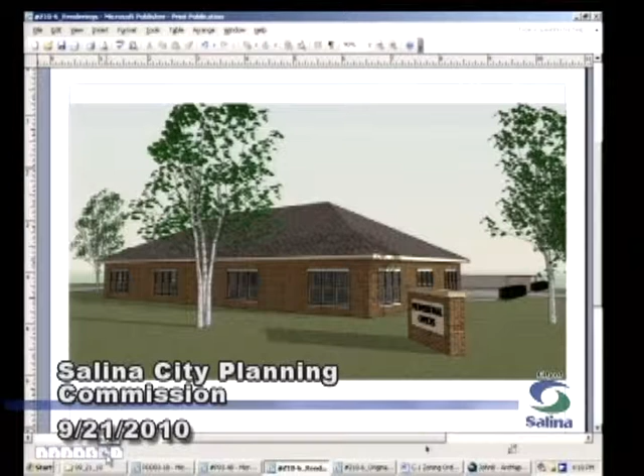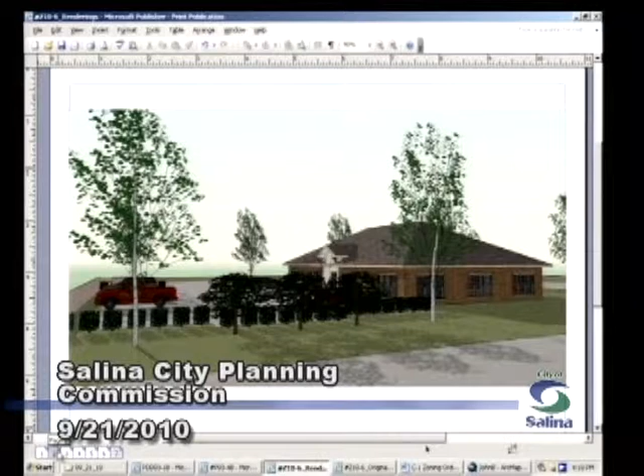This would be if you were driving or walking on Briarcliff and looking at this from the west, and looking back towards Marymount and the Marymount-Crawford intersection. So if you had a house on the west side of Briarcliff looking back, this is, as proposed, what the view would be. So I think with that, John, if you could go back to the overall site plan.

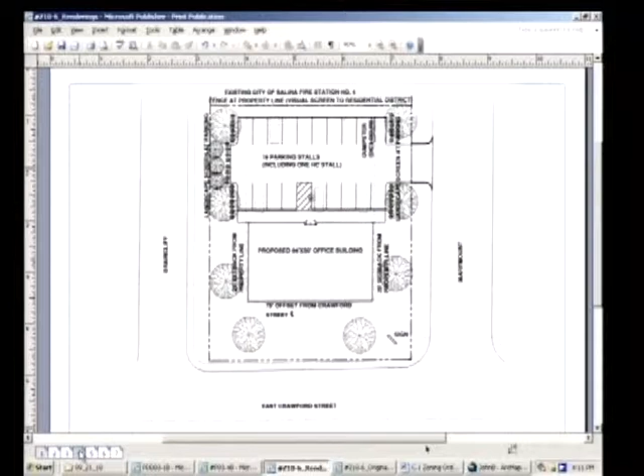Mr. Stack has not even seen this, so he can't comment to you about driveway locations or anything like that. That's why we would like an opportunity to review and write a report for you. But this does a very good job of at least giving you the concept for how everything would fit on the site. So we'd be open to any technical questions.

Bill did call me yesterday, and that's what we talked about as a good location for the driveway—far enough from the intersection as he can get and not on the residential street off of Marymount. So it looks like it's the best of what he can do there, and it looked great to us.

So we would hear any technical questions you might have, and then let the applicants present what thought went into their concept, and then, if Mr. Hutchison has any comments, he can have an opportunity for those, and then take direction from you from there.

I agree. It seems inappropriate to take any action at this stage without giving staff and the community members time to see the plan and be able to comment, and us as well. I would like to hear from the applicant and any questions that the board might have of you.

I'm Bill Shepard. I can answer any questions you have. My address is 430 Greystone.

Is the plan that this building house one office, or will there be several? There could be two. I mean, there's not a ton of room to have more than that, but I could see one or two offices in the facility, yes. Do you have anything in mind? Working on some stuff. I'm not at liberty to say at this point, so.

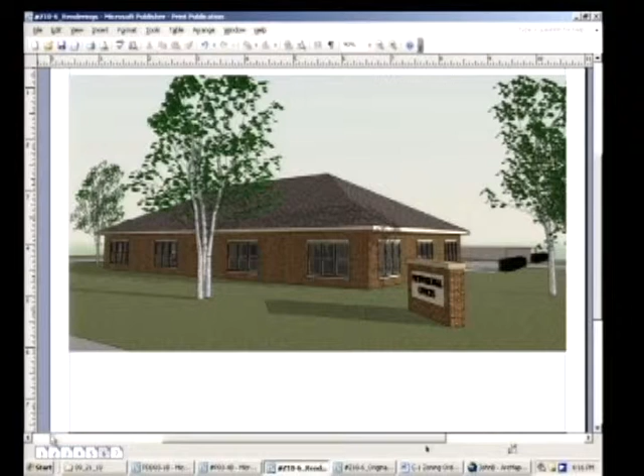I noticed on the plan you don't have any building sign, now they could have a building sign too, is that correct? That's correct. You don't have any building signs on the Crawford Street side, is that by design? That's our intention, is to not have that.

Would you be leasing the space or selling it? Both, either. I'm not sure at this point.

Was that big tree that you took out getting in the way? Yes. Yeah, 65 years old, to be exact.

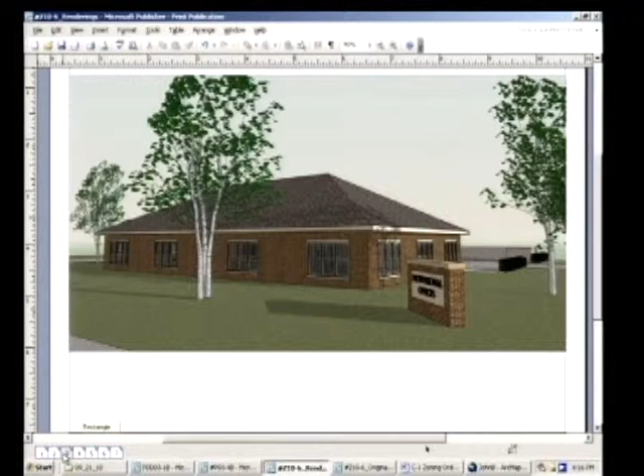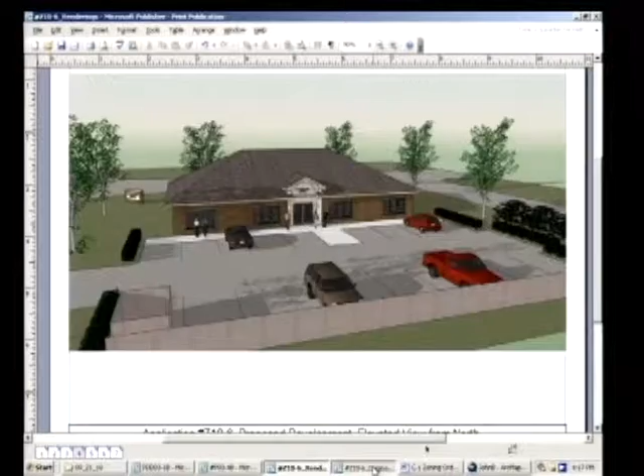John, could you go to that rendering that shows the fence on the north? And maybe you could help us a little bit, Bill. There are some trees planted along the south side of the fire station site. I think you have that in your earlier slide 2, in the original application. But how do these trees over here on the left, they don't seem to show up on those renderings. I assume they would be somewhere between the fence and the fire station building.

Our intention is to save what we can there. Those trees are actually on our property. It depends, but our intention is to leave them if we can.

But as it stands, that fence shown on the plan would be sitting on the property line, roughly. Within the property, yes. So it would be south of the property line then? That's correct, yes. And the trees would be, they're pretty much either on our property or on the property line itself.

I'd like to leave them. I think they need to be trimmed up, but I'd like to leave them. I like them, I think they add to the attractiveness of the property, and it's a natural screen. It helps people farther up Briarcliff, and that's an issue. I believe the fire department or the city's forestry department planted those trees, but they may not have done a good job of measuring.

Any further questions of the applicant? Thank you, thank you.

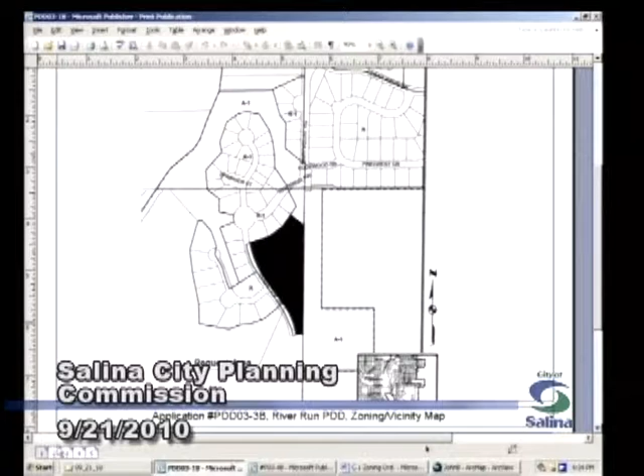We had a full 94 acres that we were dealing with. There was a condition that in the townhome area a final plan needed to come back to the Planning Commission, and that was done later in 2003. John has that plan up here on the screen.

By way of orientation, this is River Run Parkway that comes in off of Marymount. The Elks Club is over here. This is Overlook. The idea was that you would have individual driveways here, and then an internal driveway that provided access. So that was not treated as a private street per se, but as a driveway.

So we started out with one large lot, which is Lot 1, Block 5. It had 10 buildings on it, with 3 units in each building. The underlying zoning is R2 for townhomes.

There were elevation drawings submitted as part of that, showing 2-story buildings with woodlap siding and pitched roofs. The townhome units would be owned by individual buyers, and all the exterior yard areas would be common area. The lawns, yard areas, the driveways, the service drive, those would be owned and maintained by a homeowners association.

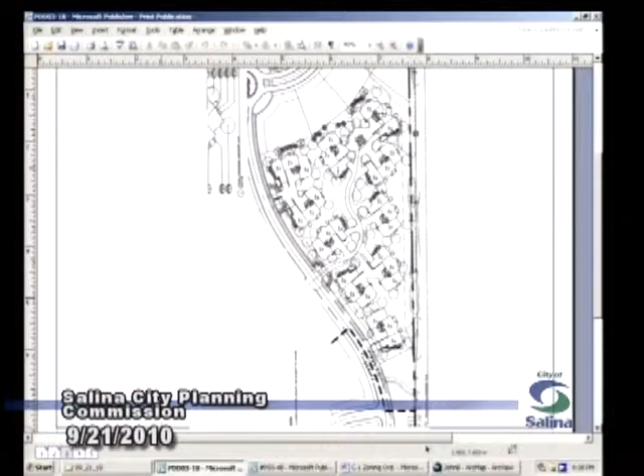John, you can go to the next one. Well, the next one after that. There may be one more after that. Okay, yeah, so basically the substitute plan is going to still have to show this townhome there and reference those units.

These are building tracks within that PDD area, and then there's some common area left in there. But the concept is that you have single family, single family, single family, single family, single family, so 8 development sites with overlook, and then these sites internal, and this would have to be a named private street.

Some of the questions we had initially were, in the remainder of the subdivision, there were 3 types of lots: villa lots, manor lots, and estate lots. Each had customized lot size and setbacks, and it wasn't clear to staff, nor could we tell owners across the street, what was proposed here in the way of those housing types.

Then it appeared to us that this was going to be a private street and try to make use of some of the existing driveway there. And it was not clear to us whether the covenants that were in place applied just to the townhome area or subdivision-wide in terms of any amendments to those.

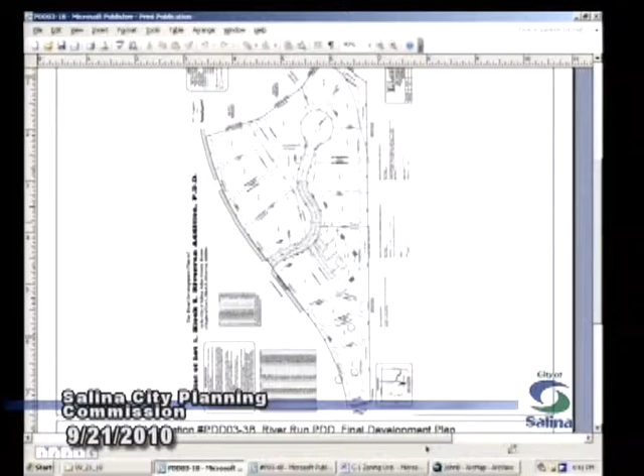So with that, this is focused on the land use, single family versus townhomes. I'd be open to any questions about that aspect. But we have an ordinance that zoned this for 10 townhomes, 3 townhomes per building, and we'd have to undo that and make this single family. And so...

We would hear from the applicant. You have some of the responses to our staff report questions attached to the report, but I think the applicant would be in the best position to state the concept for these 14 proposed lots. But before that, I'd be open to any questions you have.

Any questions, staff? Did you say the bottom three lots weren't buildable? Well, today they would not be buildable because the pavement stops here. And the utilities—John, if you could go back to that first plan.

The townhome plan, it might be two. I don't think this would have been buildable either, but basically the paving stops right here, and so does the water line. There would have to be some additional utilities extended to make those, and paving extended to make those fully buildable. Within the townhome area itself, most of the utilities are already there—it's just that they were laid out based on the townhome layout, so it has to be retrofitted to make this work. But again, I'd be open to any questions you have about the PDD concept.

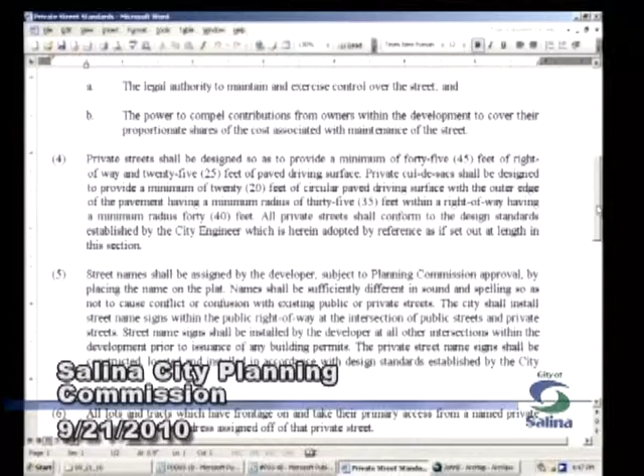Except for those things, the private streets are supposed to conform with the public street standards. They are supposed to be named. If you drive down Markley Road, you'll see at the intersection of Florida Soul Drive and Markley Road a white sign and a green sign. The green sign tells you that's a public street. The white sign tells you that's a private street.

So Florida Soul Drive is a private street. East Bank Drive off of Marymount Road is a private street. Barlow Court is a private street. All the streets in Highland Meadows Hamlets are private streets. Horizon Drive in Presbyterian Manor is a private street. And so the way those are denoted is with white street signs that denote them as private.

They are not compelled to make this a private street, but when we looked at it and we were trying to see how this could be made to fit, it comes closer to conforming with the private street standards. And so some of those have been modified, and so the requirement is that all private streets shall conform to design standards for public streets established by the city engineer.

That includes curb and gutter. So you can't build private streets without curb and gutter anymore, and the plans have to be reviewed and approved by Mr. Stack prior to construction.

You can grant variances to some of those requirements if you don't think there'll be a harm to public safety, if there are unique conditions with the property, if there are physical conditions that would make it a hardship to comply with the public street standards, and the peculiar conditions were not the result of, or were not created by, an act of the property owner.

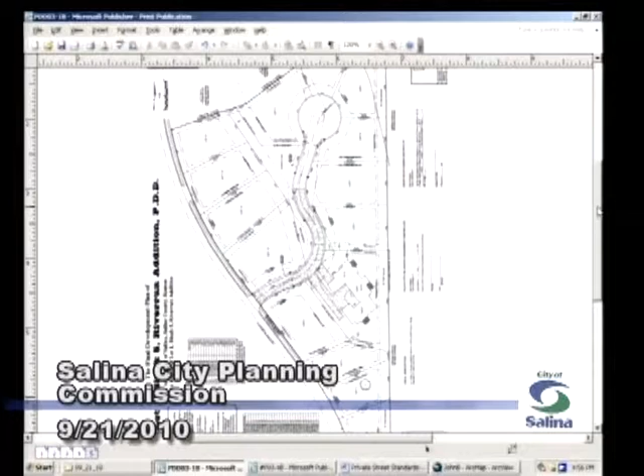So what you have is a thin corridor here, because when you build a driveway, driveways don't have right-of-way - they just have the body of the roadway. Driveways don't have to be 25 or 29 feet wide. So they were trying to take advantage of the existing roadway, and also if you start widening right-of-ways to 50 or 60 feet, you start eating into the places where you can actually build something. If you tried to retrofit this into a standard design, you'd really be eating into those lots. So their idea is to have a narrower right-of-way, but to have utility easements behind the right-of-way for the existing utilities that are there.

On lots 13, 14, 15, where do the driveways come off then? John, you may have to blow that up, I can't read the numbers. Off Overlook, okay. I couldn't tell if there were any cuts there - there's already a pre-existing curb cut on 14.

What about 15? There's nothing there, not a curb cut. But there would be, though. So these lots here would all be oriented to have access and face Overlook. This lot, this lot, this lot, this lot, this lot would be internal and have access off of that road.

Exit off of Overlook - how do you get out of Overlook on the south? Overlook is a city street. Yes, all the streets in River Run presently today are public streets.

So I'm just trying to think through - if this were a usual subdivision, what kind of street would we classify Overlook as? We considered it a local residential street. And there would be no reason not to have driveways coming off of that? No. Okay.

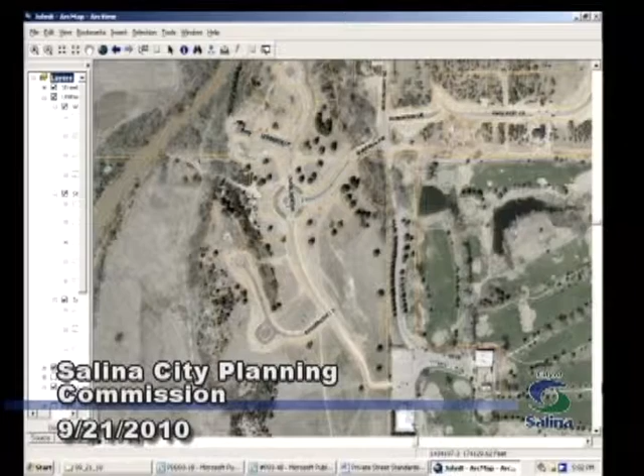I'm Sam Malinowski, Cook, Flatt & Strobel Engineers, 210 Southwind Place, Manhattan, Kansas. We've been working with Dean pretty much all summer on this. As far as all your concerns, the main reason for the right-of-way width is you've got to have utility easements in there. Being this is a retrofit where we're taking townhomes out and putting in single-family, all the utilities are in place, or we've got easements for the utilities. We're going to have some utilities off the back.

Water and sewer is all in place for everything, with the exception of lots 1 through 3, which, if we extend Overlook, then they'll take care of themselves.

Pavement width, we've actually got over half the pavement already in, and we are going to try to reuse it. It's concrete pavement, so it's beefier than plain old asphalt, and it's able to stand up. We're going to reuse all of it and just extend, basically put the cul-de-sac right where it was going to be before, and just make it single family.

Other than that, it's one of those deals where we're just trying to take advantage of the change in the economy, and like Dean said, the townhomes weren't selling. We're going to try to see if we can make single family work in there. I've got Rex Veneers here too, and he can comment on the homeowner association and the existing townhomes and all that.

But do you have an opinion on how that existing concrete paving compares to what a city concrete specification is for a street? I think it's heavy duty. I'd have to go back and look at what it actually was, but I think it's probably 8-inch concrete pavement.

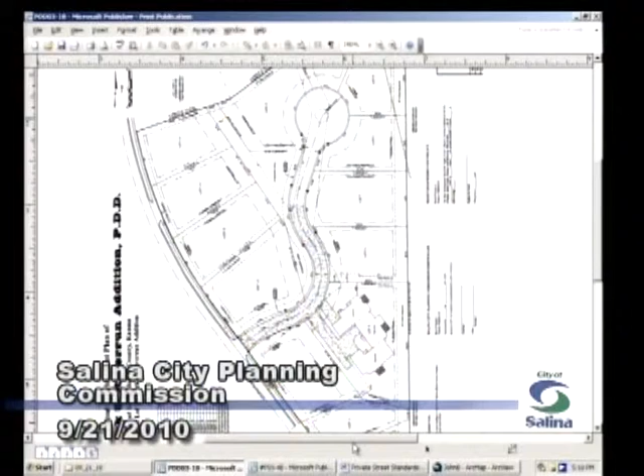I looked at, out in front of the Dillon's Superstore, Planet Avenue makes a fairly tight curve going back to the west. That is not a 150-foot radius—that curve is tighter than that, and the Planning Commission granted a waiver to that. But the 150-foot rule is just a general rule that on a through residential street, you don't want an abrupt curve that might catch people off guard.

You'll be able to make the curve, no problem—you just have to drive pretty slow. Okay, thanks. Have to do it slow.

What's the plan with Overlook as far as going on south? Now it appears to be a dead end. Yes, and dead ends are not really attractive in a city. So what's the future plan, John, for that?

If you go to slide 3 in not this application, but the next application—this is the plan that the Planning Commission saw for the whole thing, and we're talking about a street. The reason there's no cul-de-sac at the end of Overlook Drive is that this line marks phase 1. So what happened was the Planning Commission saw the master plan for the whole development, and this line right here is the phase 1, phase 2 boundary.

Phase 1 ends right here, and long term, Overlook Drive would continue down to this lower area and have a turnaround. But long term, it would terminate down there. So the reason Overlook Drive just abruptly ends is because it's not intended to be permanent. There's also an emergency access roadway that comes from the Elks parking lot over to here, for fire apparatus or other emergency vehicles, so if there was a blockage, they'd have the alternative of entering there.

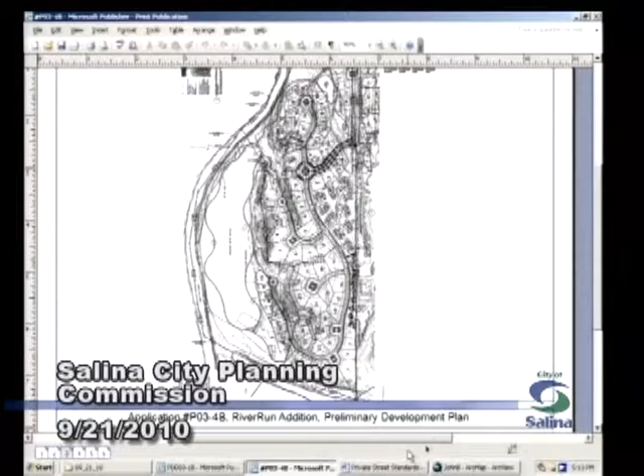Absolutely. Will you say the word chicane in it? Gotta go look that up. Yeah.

If we're looking at rezoning this for purposes of the development you're looking at, are the owners of the current unit that's there a factor in this? Should they be heard as far as this is concerned?

Rex Veneer, 6 Villa Road in South Hamilton, Massachusetts. I've talked to the Martins, and nobody's here, so that's a good thing. But I've talked to them, and they're on board with what we're doing here. In this area, on the interior part, we went from 18 units down to 9 units, so they look at that as a positive.

Thank you. I've talked to some other residents in that area, and they said it's an improvement. Everybody seems to be on board with this, but I want to make sure.

As far as the homeowner association mentioned earlier, essentially on lots 6 through 11 we'll give them their own designation, because they'll have to take ultimate responsibility if it does end up being a private road, maintaining that. They'll have another classification. Right now we have manor or estate lots A and B, villa lots, and carriage home lots. The carriage home stays as is, but now it's just 3 units, and we'll add another classification, cottage house or something along those lines, to differentiate lots 6 through 11 as also being responsible for monthly dues, really just snow removal and maintenance of the drive.

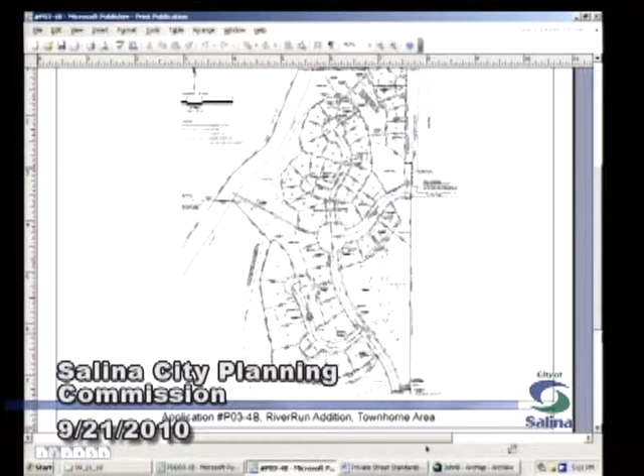Maybe that's slide 6, John. You're going to probably have to blow it up a little bit. So we have 1, 2, 3, 4, 5, 6, 7, 8, 9, 10, 11, 12, 13, 14 individual home sites, and we're basically creating a lot for this, and that will maintain its townhome zoning.

So the action on this would be to consider whether to approve a replat with the 14 lots and the private street, and as part of your motion, you would have to document that you are approving this replat with a private street, and that private street would not have to have curb and gutter, could have a 24-foot paving width.

Have less right-of-way. Your other menu options are you can, through your motion and action, prohibit or limit parking on that internal street. And then the other aspect is whether you think it's practical.